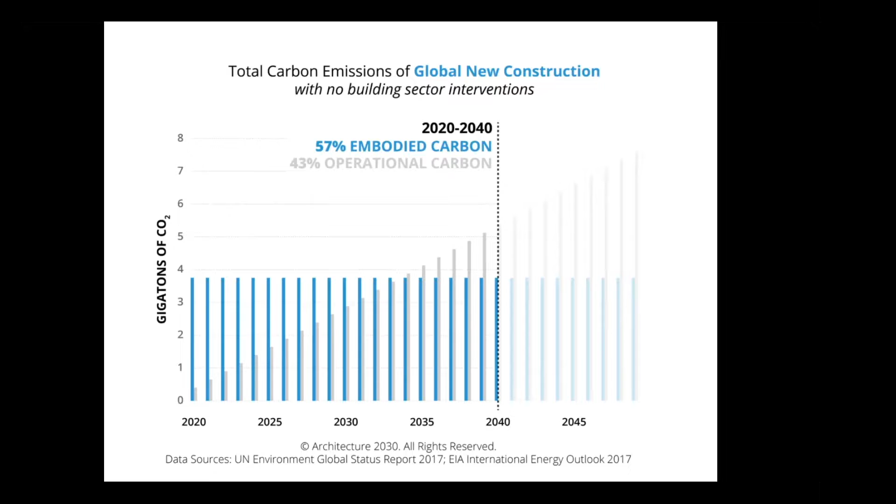And so as we sit at the brink of a climate crisis, whose evidence is all around us. We only have to look out the window these days to see it. The embodied carbon is a really serious going concern, and it's only in about the last decade that we've begun to even acknowledge it. By way of example, the city of Vancouver just recently has begun to track embodied carbon ahead of hopefully regulating it, whereas operating energy has been regulated for many years now. And so this has been really motivating for me in my research as an architect.

So it led me to co-found a company a little more than a decade ago, making sustainable alternatives to conventional masonry materials. So these are aluminosilicate clay, alkali activated clays that can be used to replace cement, which is responsible for anywhere between 5 to 7% of global carbon dioxide.

And it requires giving up on one paradigm, the conventional construction materials paradigm on the top, in which we mine raw materials, truck them to a manufacturing facility, convert them into the raw materials for buildings, and then truck those to the building site, and think in terms of using materials directly from the building site for on-site production. So this would be the image on the bottom, in which we use materials on site to produce materials for buildings.

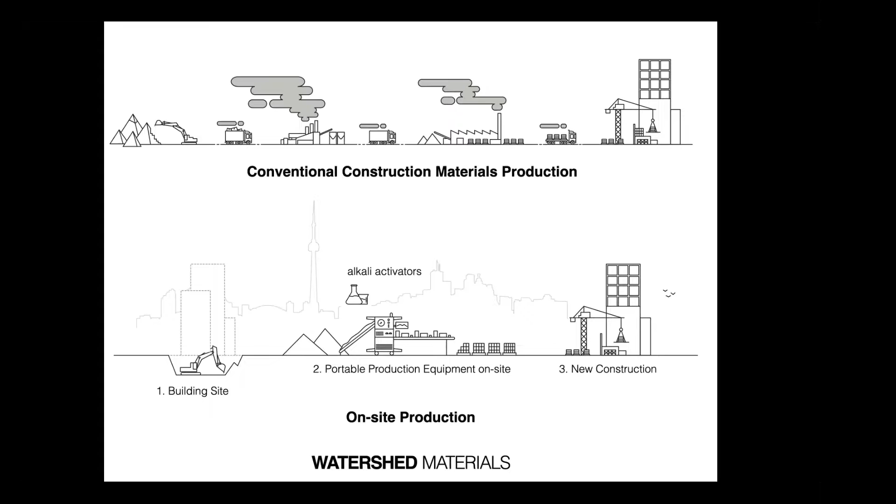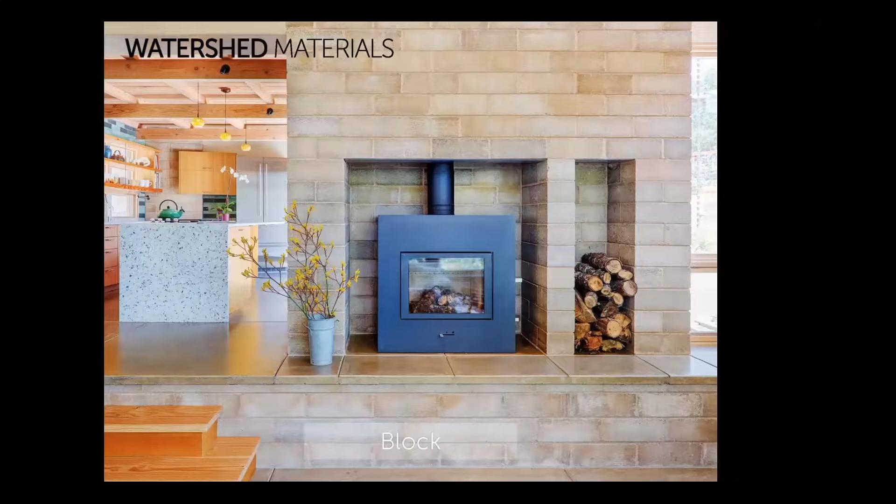And so with the support of the National Science Foundation and US Department of Agriculture, because a lot of it's soil-based, we've developed some modular equipment to produce these masonry materials. So these are soil-based masonry blocks that offer virtually the same performance as conventional concrete masonry units. And you can see we built a few pilot homes. This is a startup based in the Bay Area of San Francisco.

We've also developed precast panels, a whole range of soil-based building products that offer very similar or even the same structural performance as conventional cement-based materials and products, but offer close to half reduction of the embodied carbon of conventional concrete products. So that was a lot of my activity before joining the faculty at UBC, and persists now.

But in the last 5 years or so, I've gotten really interested in another area of materials. So if the concrete block is a ubiquitous material for construction used around the world with a tremendous part of the environmental impacts of building, we also use a lot of what are called polystyrene foams. So you'd be familiar with these in styrofoam cups and things like that.

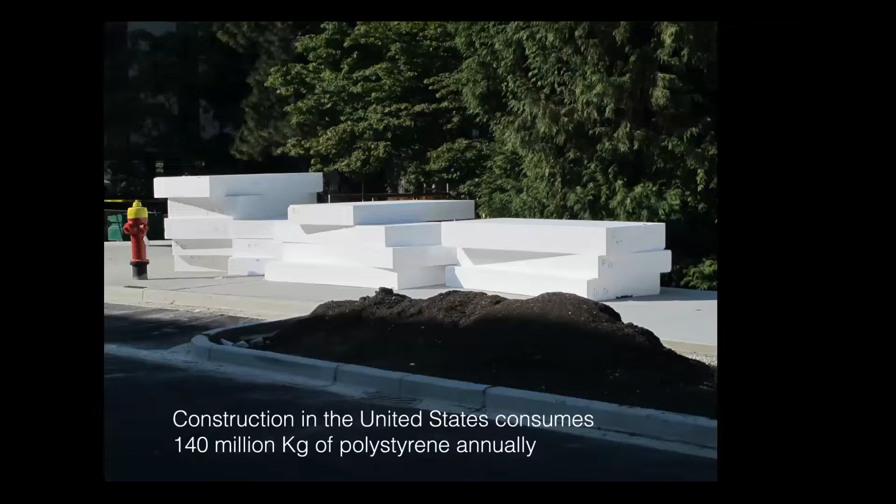But sometimes people are less cognizant of the amount of these products we're using as building insulation. And so they start off like this. The US uses around 100, it's actually up to 140 million kilograms of polystyrene annually. And that's only about 5% of the overall use for buildings, and it quickly ends up like this. So this is a waste polystyrene manufacturing facility in Abbotsford.

So you may have heard some reporting on mycelium biocomposites. About a decade ago, a couple of graduate students at Rensselaer Polytechnic Institute came up with a process to produce a kind of sustainable alternative to polystyrene foams using sawdust and mushrooms. I say sawdust, but really it's any kind of waste cellulosic material together with the mushrooms to produce these biocomposites that have similar strength, weight, and thermal resistance to polystyrene foam, but are totally naturally produced with no harmful byproducts and fully biodegradable at the end of life.

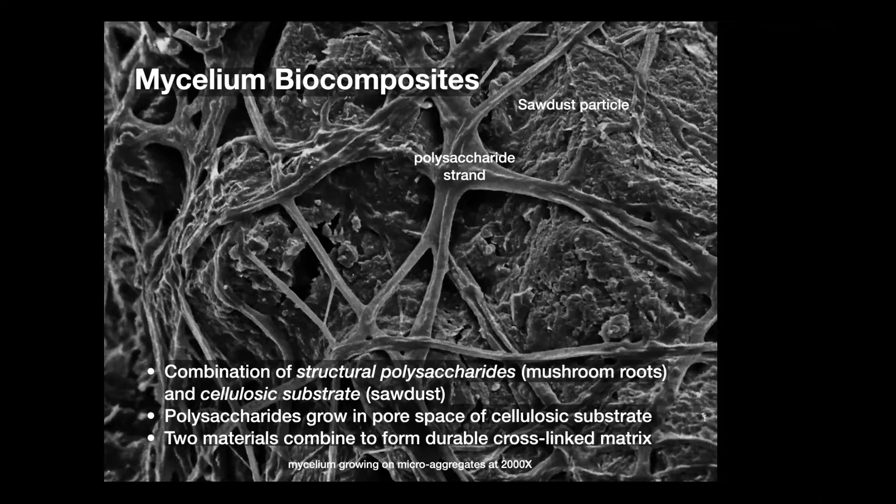So this is an image of what that kind of matrix looks like. The mycelium is just a root structure of mushrooms, and the polysaccharides surround, in this case, sawdust particles in a kind of cross-linked matrix, growing in the interstitial spaces. And this produces actually a very durable overall structural performance. It's been used widely in packaging, but there's growing interest in use as a substitute for polystyrene-based building materials, or the insulation portion of those materials.

So the process looks something like this. You can take a waste cellulose product, you need to sterilize it, or in some cases pasteurize, to eliminate competing microorganisms, and then add spores to it, and then incubate that growth medium under controlled conditions for a couple of weeks, after which you can mold it into blocks that can be demolded after anywhere between 5 and 10 days, and then assembled into a whole that will actually grow together.

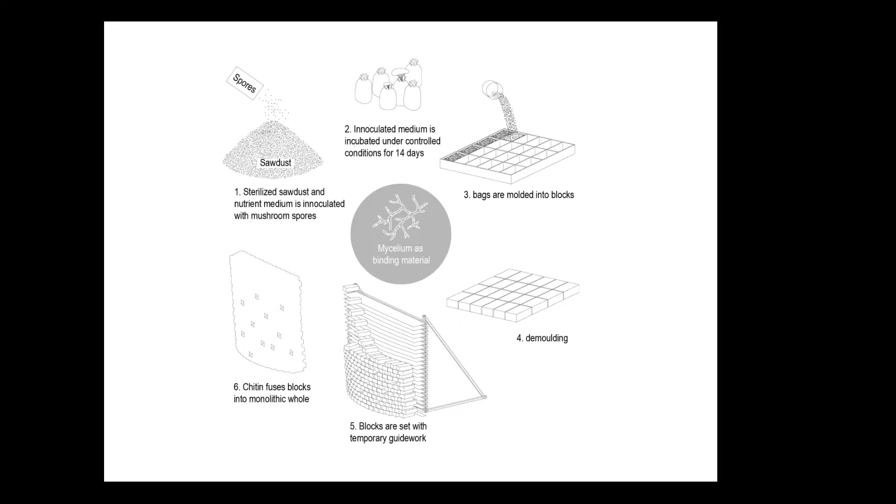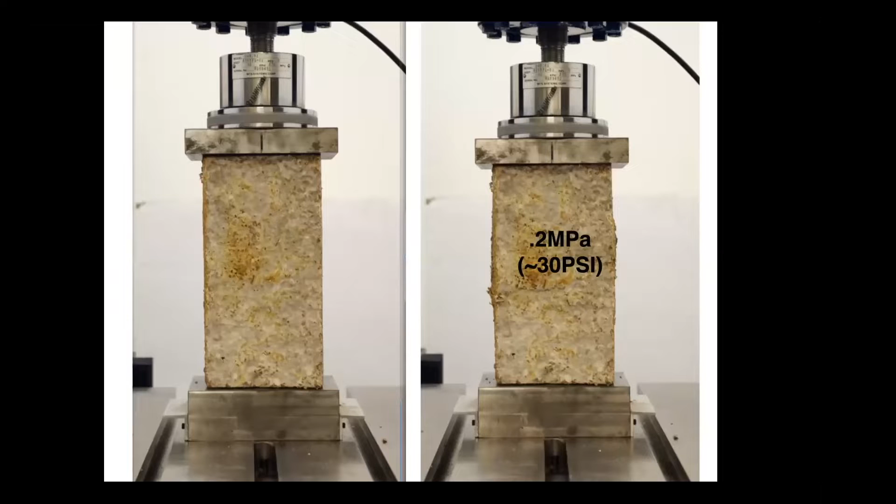And so we've been undertaking this at UBC. This is actually a greenhouse in the South Campus, and that's a landscape architecture student, Peng Fei Du, who I think had no idea that she was going to be dealing with mushrooms in this way when she got to UBC. We grew these modular blocks, really bricks, and we took them to the Centre for Advanced Wood Processing and tested them. And they actually developed about 10 or 15% higher compressive strength than comparable polystyrene foams.

Of course, we're less after the compressive strength here than the thermal resistance, and they display virtually the same characteristics as polystyrene foams. They're hydrophobic, so they actually repel water, which is part of the mushroom's natural defense mechanism to keep from drying out during a dry spell. But what's really interesting is that two discrete elements will actually grow together. This was a bag we left over a weekend in the lab, and when we came back, we were quite surprised to see that it had fused together. So for an architect, this is really quite exciting because it suggests a whole range of possibilities going from a modular building product into a monolithic whole.

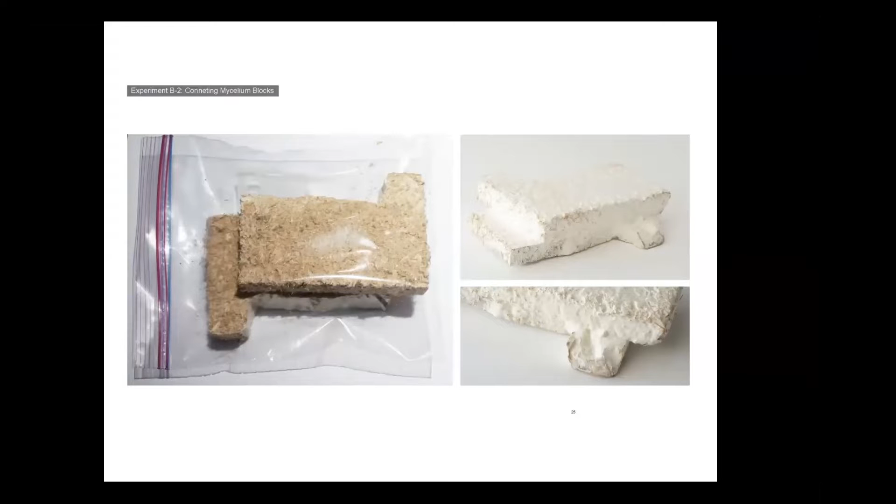And so being architects, we got pretty curious to develop a mock-up wall section, which we did for the Museum of Vancouver a bit more than 5 years ago now. So this was the mock-up wall grown of these discrete blocks, and it actually started producing the mushroom fruit. This was a bit of a happy accident because the weather changed and we didn't have great climate control where we were growing it. So it got cold, and when the mushrooms get cold, they feel the onset of fall, and so they tend to fruit like many other non-fungal varieties of plants. So we rolled with it and hired a caterer and actually served portions of the wall to museum goers, who actually quite appreciated it.

There were oyster mushrooms, Pleurotus ostreatus, which we adapted here because it's a strain that grows very well in the Pacific Northwest. And I think they weren't entirely sure that they were eating the wall as they were eating these, or actually fruits growing from the wall. It looks an awful lot like old polystyrene foam when it grows.

So we also produced some benches just to kind of put them out in public. And you may have seen these in front of the UBC bookstore some years ago. So you can see here, these were grown in kind of hexagonal shapes that would then fuse together. We had limited success getting them to fuse, and contamination is a real challenge here. So the scale at which we try to grow these things sometimes makes laboratory facilities difficult.

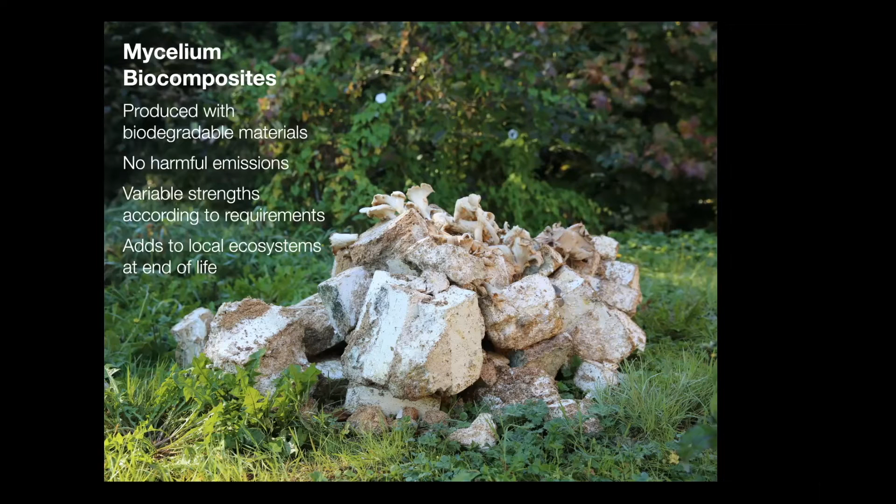But I'm working with some microbiologists at UBC, who figure large in the next project I'll talk about, to look at some of the genetic pathways we can use to perhaps turn these organisms on and off so that they can add to local ecosystems at the end of life. So we've had a lot of research assistance on this one, as well as funding from a variety of sources.

And so those are a couple of projects looking at mycelium as a kind of structural material for buildings and furniture, sort of human scale on up. And I wanted to close with a somewhat more recent project looking at the application of mycelium biocomposites to the treatment of human waste. And so this has been a bit further afield for me, but is kind of strongly in the camp of circular economy.

So it's also a collaboration with Steven Hallam, the microbiologist I mentioned a moment ago, who's a Canada Research Chair at UBC Microbiology and Immunology. And it's supported by a solutions grant from the Peter Wall Institute for Advanced Studies.

And I thought that in keeping with our time limit today, the most efficient thing to do would be to show you about a 3-minute video that we recently produced describing the project. And after I'll wrap up, and if you have questions, I'm happy to address them.

So I'm going to go ahead and roll this. And please speak up if something's wrong with the frame rate, but it should play. Let's see.

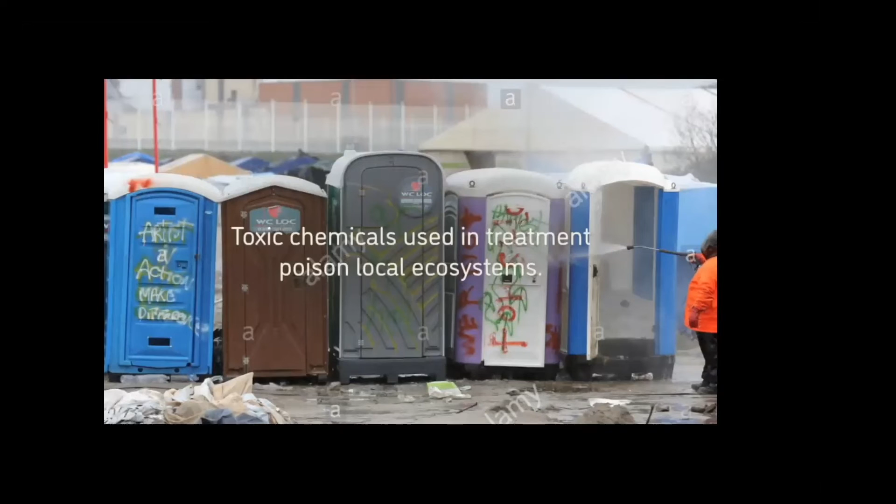So the students involved went and presented this project in New York City and won the Biodesign Challenge, which was at the Museum of Modern Art in New York in, I guess it was 2019. And this involved about three or four faculties at UBC Vancouver: applied science, and microbiology.